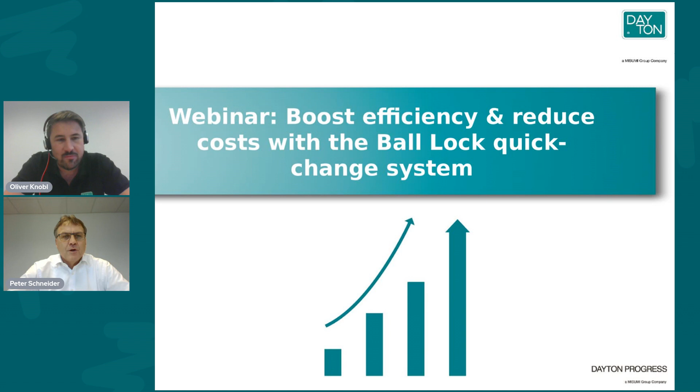My name is Peter Schneider, Managing Director for Germany, and I'd like to use the chance to show you the Ball Lock system and also to explain a little bit the features and benefits and of course the function of this system. The Ball Lock system is not new. In fact, it has been on the market for more than 70 years and it is widely used in various applications. Currently, its primary customers are in the automotive industry like VW Group, BMW, JLR, Ford, GM, Tesla, and all other bigger companies which do mass production.

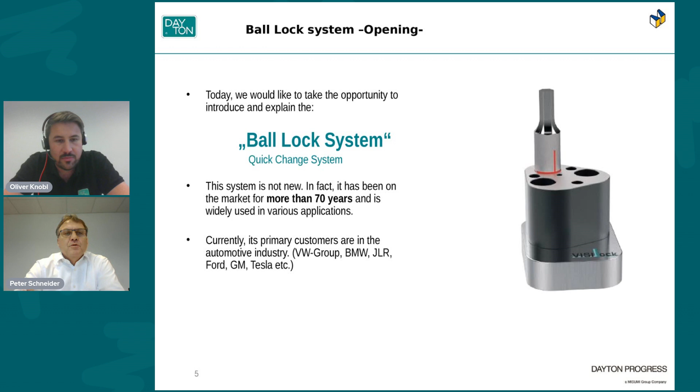On the right-hand side, you can see just 3 examples of the punches. The small ones are showing the Ball Lock heavy-duty and light-duty versions. The difference is just, let's say, the tier, what you can see as a small groove in the punch. And the other one is the Ball Lock punch point larger than shank. That is the punch that you can use for bigger holes and so on. With its accuracy, the Ball Lock system is suitable for numerous stamping applications in the automotive industry, in the white goods industry, in the appliance and other sectors as well. In the next slides, I want to show you how it works and how you can use it.

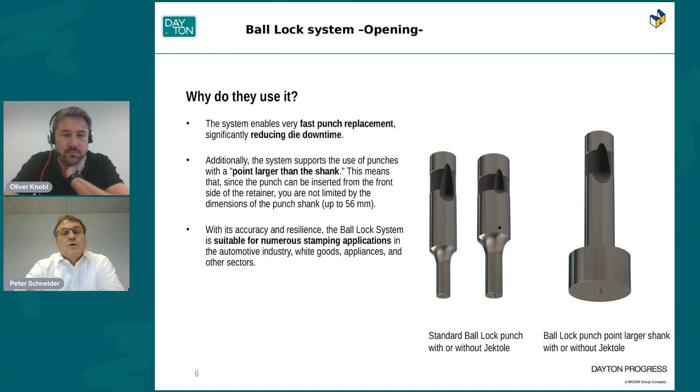Here you can see a small cutaway view of a retainer with the punch in it. You can see in red the ball. Behind the ball is the spring which keeps the ball in position, and this ball has the effect that the punch cannot come out. On the right-hand side you can see the ball itself and different springs. These springs are changeable in the retainer depending on the spring load you need to have the ball in the right position. As well, you can see different tools to pull the punch and to push the ball back so that you can remove the punch out of the retainer.

A short explanation of how it works. In the ball lock system, the punch is mounted into the retainer that features a spring-loaded ball to hold the punch securely in place and ensure proper positioning. Mounting and removal are very easy. To mount the punch, it simply needs to be inserted into the retainer from the front side. On the opposite, to demount it, it's very easy. You just have to remove the spring, the ball, and you can remove the punch out of it.

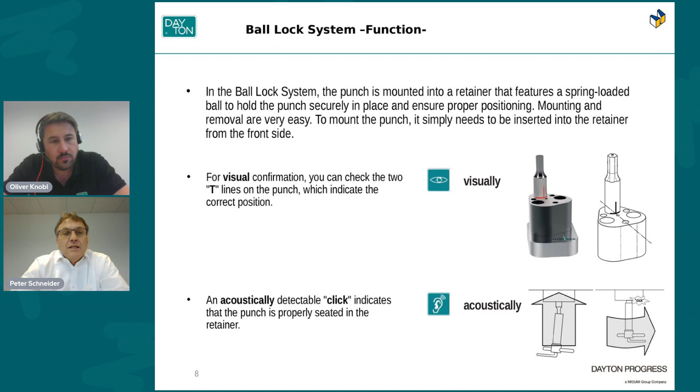To remove the punch from the retainer, the ball needs to be pushed down using the punch release tool. You can see it on the left-hand side. The retainer can remain in the die, but by simply releasing the ball, the punch can be pulled out. This saves a lot of time as there is no need to demount the retainer.

During this process, you can use the punch release tool that you can see also on the left-hand side. It has two functions. You can hold the punch very well, and of course it also has safety features. You can't come in touch with the shape itself. That means you can't cut your hand and you can't destroy the punch.

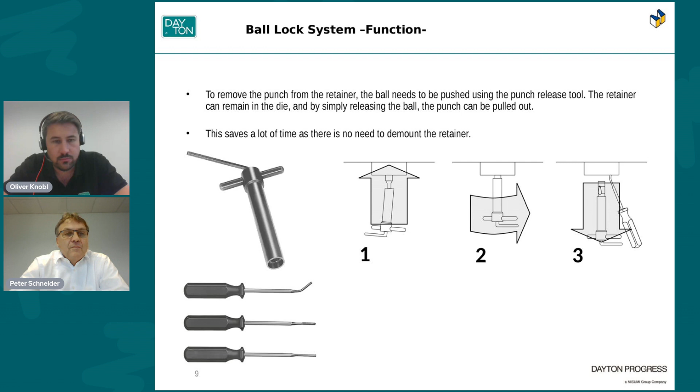We have a short video which will show the function, and how the T, that means the VisiLock, as it's called from the Dayton side, is working and how it boosts your efficiency.

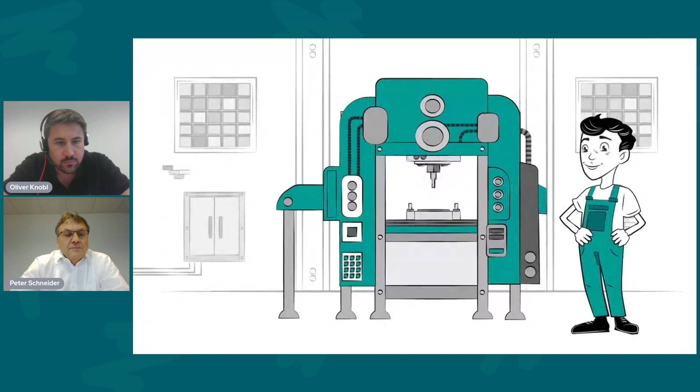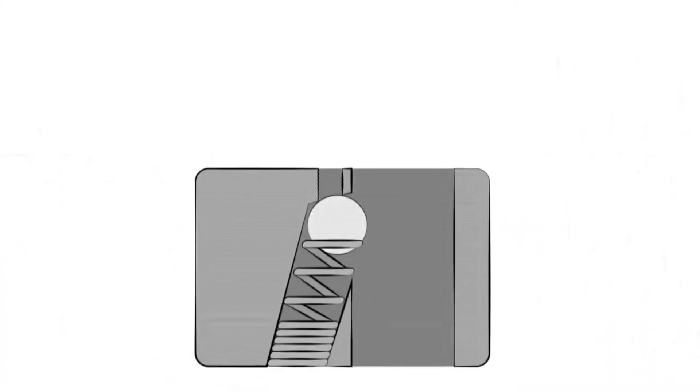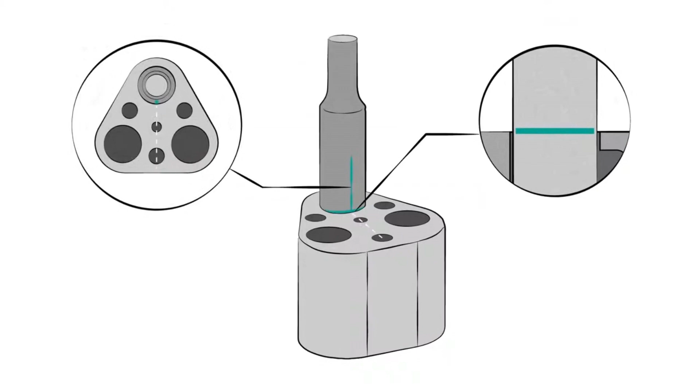Production is in full swing for a customer, and then tool breakage. How could this happen? The ball lock punch was not correctly positioned in the retainer, which is why the punch came loose and damaged the press during the next stroke. This is extremely annoying because repairing the machine and shutting down the production is very expensive. Theo knows how to prevent this in the future by using ball lock punches with VisiLock. Theo knows exactly when the punch is correctly positioned and cannot come loose. When the horizontal marking lines up precisely with the surface of the retainer and the vertical marking lines up with the ball release and the pinhole, the punch is correctly positioned and locked in place. Theo is thrilled. Thank you, Dayton Progress, for solving my problem.

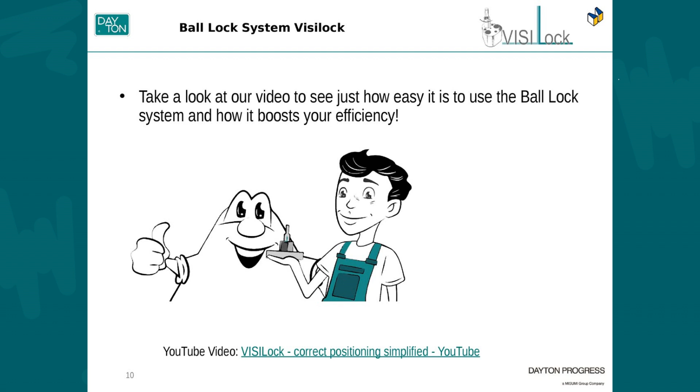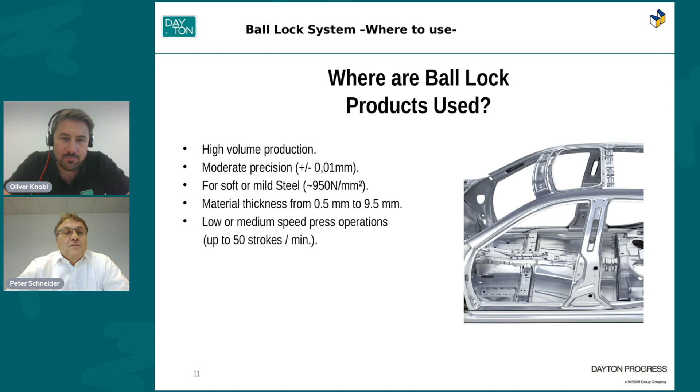The first step during the evolution of the ball lock system was just one system available, and at this point in time it was called light duty. But today, depending on the new demands on the punches, what they have to hold and what they have to do, we have two systems on the market, light duty and heavy duty.

Light duty applications you can use up to a maximum stripping force of 25 kilonewtons. In the Dayton system, you can see it marked with a C, and the heavy duty versions are usable for a stripping force of approximately 35 kilonewtons. This is our type B.

We have standard sizes for the punch shank, and we also have standard sizes for the retainers. You can see the numbers written here. On the right-hand side and on the bottom you can see different pictures of retainers. Beginning with the NRT, this is the easiest one. The NRT is just the retainer with the punch hole and two screw holes, and it is only usable for a round punch hole because the position is given through the dowel pin hole in the center of the punch.

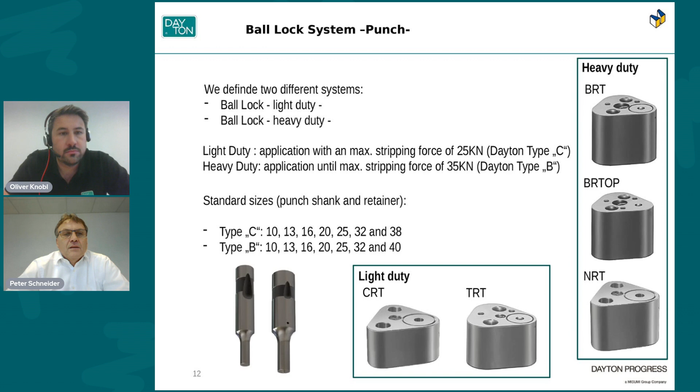For the ball system, like I explained before, we have different retainers. We have already seen the plug version. We have already seen the solid version, the BRT-OP. On the right-hand side, you can see the multi-position version.

Our retainer, the triangle, which you can see, has been developed to optimize the size of the retainer, so that you can bring some holes really close together in the same application. But sometimes you can't use these retainers because the holes are too close to each other. Then you can use a multi-position retainer.

This retainer is a specially developed part for the customer. We just need your data on which positions you want to have the punches, and then we can define your retainer for you. That is always possible, and here too we have different sizes, different possibilities. You can have it with the plug, or you can have it with a complete backing plate behind the punches.

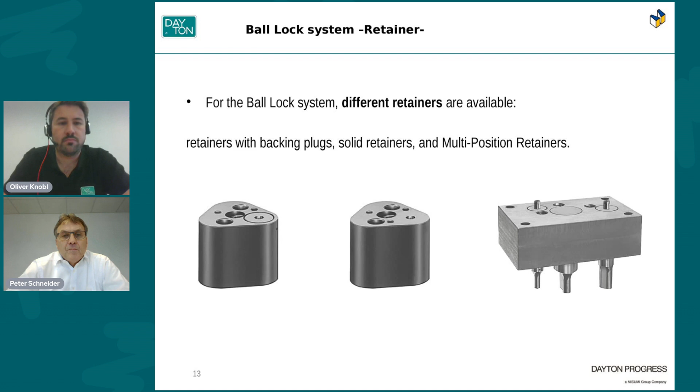To make a short summary of the benefits of using ball lock systems, just some comments again. Fast punch replacement: you can really reduce your downtime. You don't have to demount the retainer out of the die. That means you don't have to open 2 screws, you don't have to demount 2 dowel pins, and you don't have to clean everything. You just have to pull out the punch, put in the new one, and you can start with your production again. The quick change mechanism optimizes production processes very well.

It is easy to use, like you've seen in the pictures before and in a short movie. Putting in the punch and pulling out the punch is really, really easy. And with the features we have, like the T or the click that you can hear, you can be on the safe side that the punch is in the right position. It ensures precise punch alignment, confirmed both visually and acoustically.

Versatility: it is suitable for a wide range of stamping applications, including automotive, white goods, and other appliances. At first, as Olli explained, we care about your time. And so with this system, you can really dramatically reduce your setup time. As I explained, no need to demount the retainer for punch changes really saves your time.

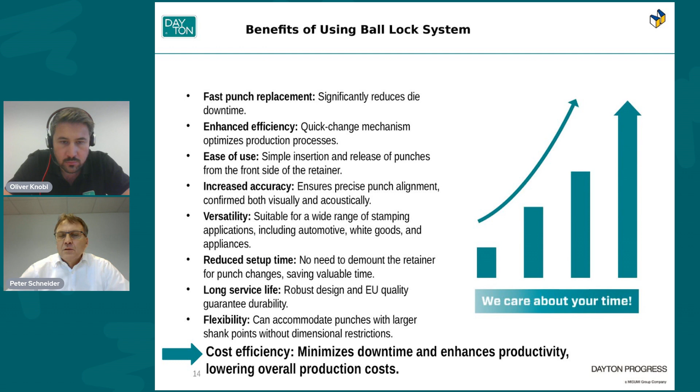You've seen on the first pictures we have different springs which we can put into the retainer, called booster springs. Booster means nothing more, nothing less: we have a higher force on it. You can see it here. We have a higher force on this, and you can really keep the ball down.

Of course, each positive effect has a negative effect. In that case, to push in the ball to remove the punch is harder to do. But also we have a solution for that. In the retainer there is a small thread in the hole that you usually use to put in the punch release tool.

You can also screw in the punch release tool. It has a thread on the outside. It doesn't depend on whether you have big arms or small arms. You can use it to help yourself.